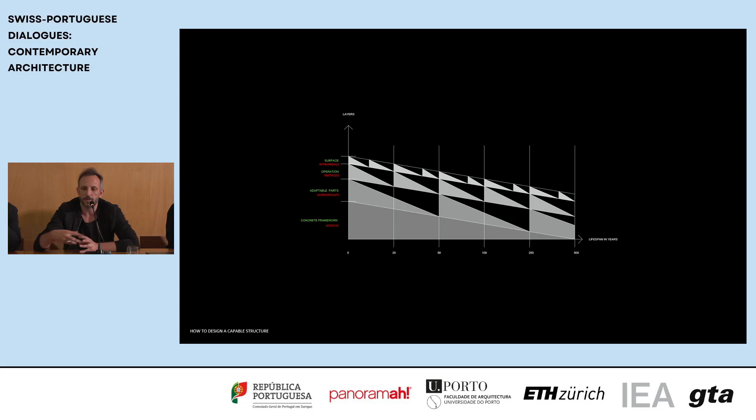So in order to design a kind of high-rise, we thought about, well, what can we bring to the table? It was about this single idea that can be read at all times and that can actually survive any change. And the most important part for us was actually to provide a basic, let's say, rigid tectonic that then can be adapted.

The way to build it is actually self-explanatory, but there's one way you understand it as a reality and another way you actually do it. The model you see here was only ever built to the part where the little drone is flying, and everything else was done inside our room at the time we were thinking about how to show this idea. On the other hand, you also see our entities - the very large, fluid, and flat, sort of spatial one in the institute.

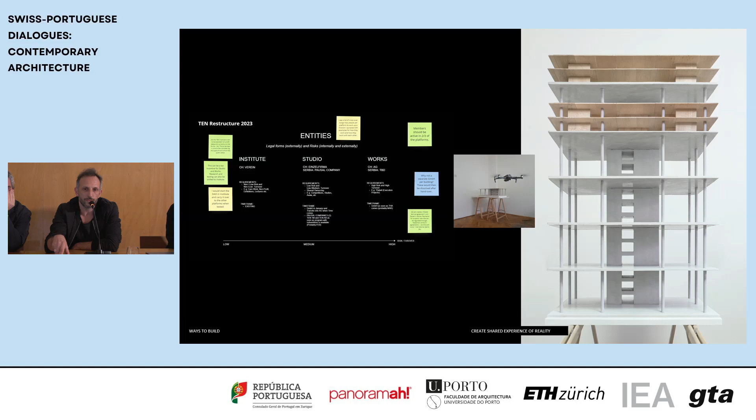That kind of structure, call it a capable structure, allows you to explore and determine other possibilities within it, which to us is an ongoing question, and something we're still designing in this building.

Even just understanding where you are from these rooms, you would know your place in the building. You would know your possibilities, and how to deal with the space - how to divide it, how to attach, whether it's a concrete ceiling, a wooden ceiling, or a wooden floor. It totally determines your everyday, from the acoustics to even the well-being. We think that's a kind of complexity and richness that could be rather beautiful in terms of how we design high-rises.

Of course, this plan was developed at the time so that any of these options, or all of them at the same time above each other, could work to provide a very long-term flexibility - the same way we think about how our organization works.

To continue with that quick chapter, I'll quickly show a project that is now ongoing. It's in the planning procedure, going towards a building permit. It's a competition we won a couple of years ago with a partner from Zurich, Zurich architects, also for a high-rise. We were lucky that the second attempt landed.

Here it was really about thinking again the question of why do we even want to do a high-rise. Is it actually an answer to the biggest question we have today in terms of architecture and production of space? And that is resource, and sustainability, and actually our planet around us.

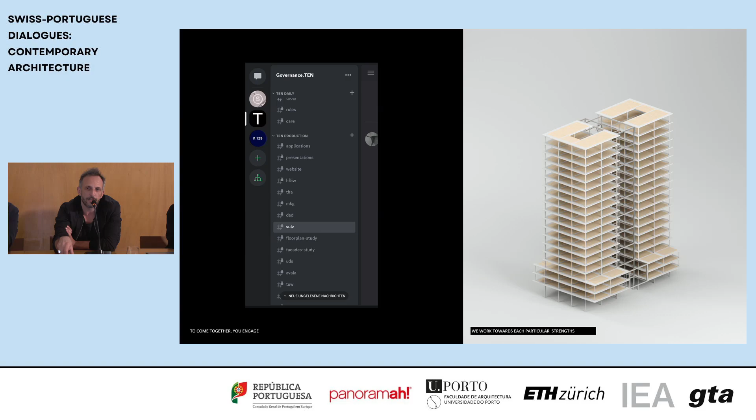So steel, basically going fast and going vertical, much like the American experience has taught us. Concrete, which can be prefabricated and be very repetitive on both sides, providing open long-term stability. And then wood, which would also give it its color, its smell - another kind of lightness to the whole ambition. Somehow pairing these strengths together was a mission for us.

And we wanted to make that readable. So at the moment you're seeing some preliminary design drawings and images that show this tower, which will be developed further - the plan of it, and thinking about it, what is there to show is still again the question of this meeting in the middle.

The meeting middle, which usually in such a building can be very dark, gloomy, can be dangerous, although maybe not in Switzerland, is a place where we wanted to actually have the neighborhood going up. All these apartments, north and south side, are double-side orientated, using the two-sidedness of east and west in the middle and the core for how you get home to meet your neighbor. Somehow a little bit how we operate in TEN as well, and the diagram on the left also shows that. You see this gravity field, this kind of entities, but also many other points of interest that can totally disrupt us. We think that's also a nice way to come home every day, not through the same corridor, and actually having a chance to meet someone.

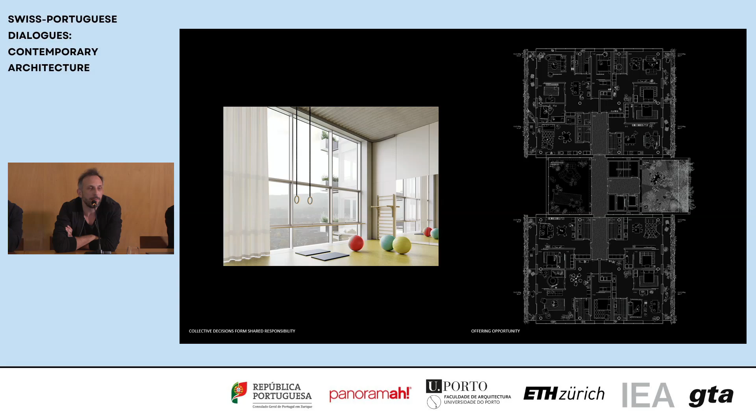These spaces offer left and right. On the right side there are gardens, and on the left side there are multifunctional spaces like aulas. We called them the winter gardens at the time, and today we were with the Panorama team and saw some beautiful examples of how something like this can be realized. Those are spaces that really belong to every resident in the house. So in a way we designed the tower so that these spaces were a gift in terms of economy of surface, in terms of engineering, acoustics, energy, etc. So they really have low demand but offer quite a lot.

In the sense that kind of collective decision—for some reason this isn't working—but that kind of collective decision making is a shared responsibility. The same way we work in TEN, the same way we accept or reject work, we come together, and it's never about a hardline vote. It's always about a mission and an understanding that we want to be in the same place and want to work together.

Sadly, the video on the right side for some reason is not working, but it shows you through these left and right alternating spaces and gardens going up, offering a very different sense of being, in terms of experience—wet landscaping going up—because one of the questions once you design a tower is: do you ever see a bird on your balcony? We wanted, working with Inside Outside, our partner in landscape, to develop an extension of the park that the tower stands on. So in a way, we're still facing this question of how to bring together an idea of residence and housing into something that is fundamentally one of our programs, such as capable structure.

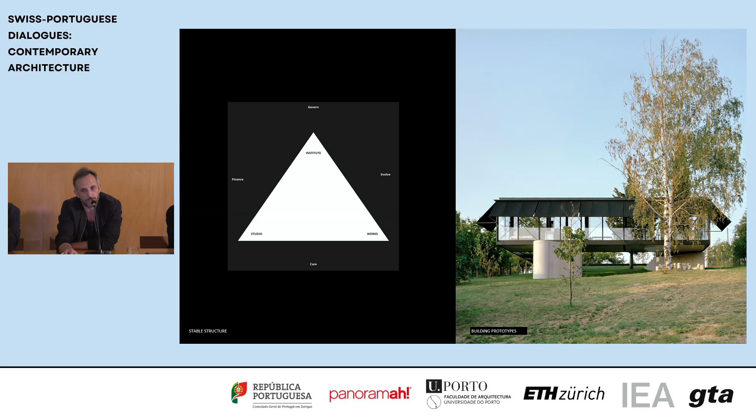This person specializes in interior wall finishing, basically plasterwork, and wanted to do a kind of model house. We immediately took the challenge to say, well, we will try to design with him and build with him a small prototype. This prototype was done with incredible sufficiency, and this sufficiency we needed to bring back every single time we talked about the project. But it was really about the ambitions first.

And the same way in TEN, it's a kind of initiative culture. So anyone can start up a project in TEN. Anyone can come with a project, or anyone can actually take over a project. All that it takes is a clear mission statement. So we do work a lot through these initiatives—you will see some maybe in the lecture. And they're very simple: as said, meeting digitally, physically, or through annotated notes, you take action.

And for architecture, we learned that actually the best way to take action is just to do something and make something. So we made this model at the start of the project, and it was the most stable factor throughout the process, even talking to every single participant and stakeholder through the construction mission. To make initiative is actually, I think, a nice finding from one of the cooperatives we were studying, Valve, that Lucas will talk about later—that you need a rule of 3, which we realized really works.

So you somehow need 3 people to initiate something, which in this particular case of a project is also the minimum load-bearing structure, because we thought about what holds a square and actually understood that it's 3 points: the 2 pillars we designed, and the third one being the soil.

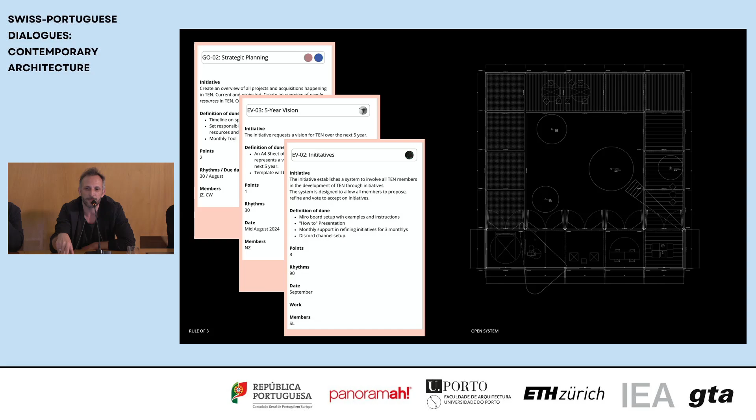So either you have a kitchen of 50 square meters, or a bedroom, or a toilet of 50 square meters, and you cannot have all at the same time. Makes it a bit difficult for guests.

I guess, so stepping into a TEN structure, you really have to get used to it. But it's about taking time, understanding the pieces in place, understanding how they join, understanding how to read it, and also how to change it, because that's really something we are working daily to achieve.

As said, I wouldn't even call Zoran the client. He is more of a collaborator of ours. So we work on the principle that there's a group of 15, 16 people at the moment, but by need we can expand, the work groups can expand. And here it was really the expansion through working very closely with him from the start.

So in a non-traditional way, never hide anything from the client. It was a proper experiment. Luckily that worked really well in this case, but it was also embracing his reality and his limits.

So he brought the third partner, and that was his friend who was 1 kilometer away, and he said, I have a very good friend, he knows how to work with steel, let's make a steel house, although he had no clue about it. So he likes to brag that his house was designed by Swiss architects, but actually that's really how the construction site looked like every day.

So sometimes you can really take that insufficiency or the lack of resource and turn it into something else by design, and add value through that.

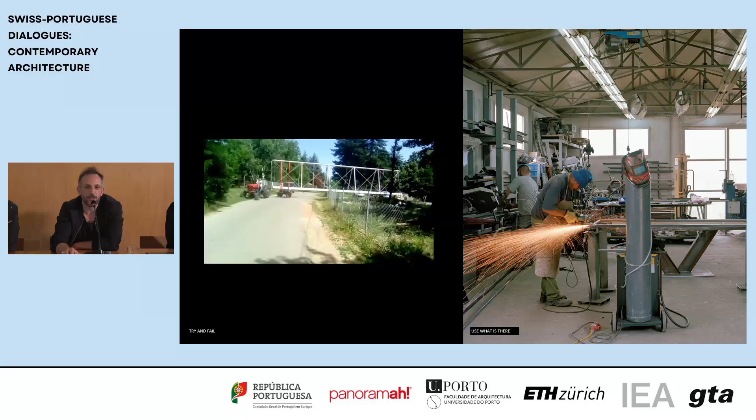This was really, in the words of Richard Wentworth, the British artist that Tom often talked about and introduced us to: making do and getting by.

This was a conversation, just an excerpt of a conversation that was published a couple of years ago in a magazine called Accattone. And unlike the internet, if you Google this house, you won't find much, but in this magazine - I recommend books still, before internet - the entire conversation is laid out with him, with the most important excerpts, on how decision-making was happening, and all the trial and error that seemed relevant at the time.

What happened after the finishing of the house is, I could say, not private, but he continued to play with it. He took it as an open resource. He said, I'm not going to just protect it now, I'm actually going to explore.

So he started adding these kinds of light builds to it, essentially extending his, in winter, his let's say in-between climate zones.

And we found it incredibly beautiful that he just somehow, without ever consulting with us—because these photos were actually, we found out only when it was done—he kind of just respected the project and continued to work with it, which for us was really a nice way to understand it as one of the capable structures.

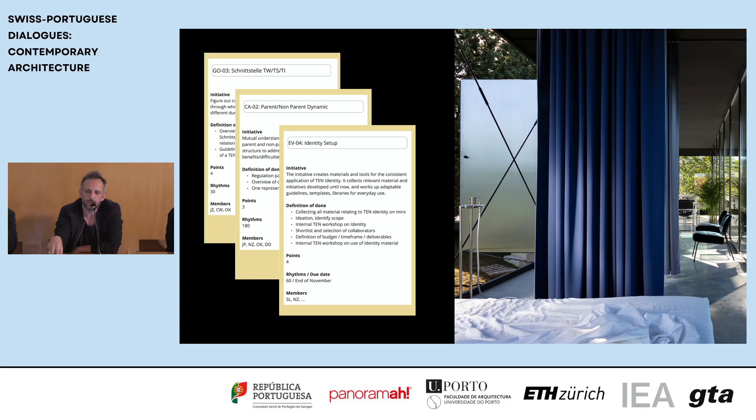So the care is something that we really brought to, I think, this project back in the day, and I think he also started to understand that and see our engagement as a young architectural practice, but he took it to a kind of whole other personal level by essentially using the house in any way possible for parties or actually quiet weekends for himself and family.

And our role in the project, and I think that was quite nice, was to really go until the very end, even constructing with him, cleaning and maintaining with him, and actually gardening with him, until we somehow achieved this kind of, you could say, an open prototype that is basically an open playground.

To jump to the next, I think this is a project we did many years ago, actually outside of Europe, in the Nepal Valley, called Thame, after the devastating earthquake that happened in, I think, 2015. We were invited to develop a residence for monks, 10 monks, on a very high remote point, and one of course the premises for that was this devastating earthquake.

And what we realized very quickly in collaboration with the locals was that essentially there were several, let's say, design and engineering failures that actually often are repeated with these structures. And this was really the first thing, and perhaps the only thing, we were able to tackle at the time. But I think in the long term, it was a good thing.

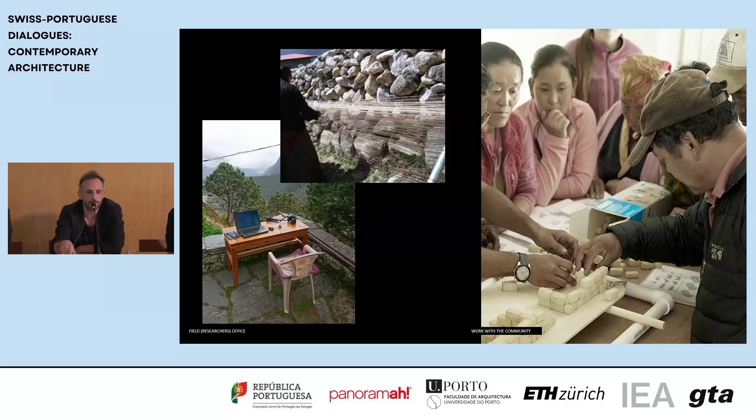What we learned very fast is there were these kind of ways that they built. One was really using gravity, and the other one was actually against gravity, but maybe Lucas can continue there. Okay, I hope I can keep up with your nice flow.

So, as you can see, one of the main challenges was the remoteness of the place. It took a 2 days hike to the next bigger town, so no road for vehicles, only helicopter or footpaths. Which meant there was an absolute demand to build with minimum means and also light materials, in order to also protect the people that would be working on it.

But also in a way it was something that they actually had experience with. And as you could see with gravity, stone is one of the main sources there. The forest is protected—it's a UNESCO heritage site—so wood actually had to be imported; they were not allowed to cut trees. So the main building material was stone and sand.

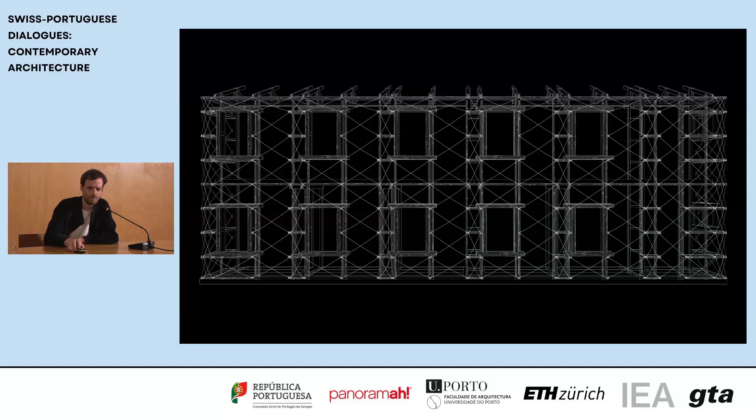Maybe to switch back again quickly to TEN. One of the things that holds us together, maybe the most long-living ones, is the mission or the values. We started with some values that are very simple, and I think it's not the single one that matters but the whole as an idea, why we wanted to work together. Of course they get edited and adapted as time grows.

What was interesting is how much a little change in something can change the whole. Here we developed a plaster system with the help of 10% lime, which made it much more resistant to weather. It's actually river mud that is slightly stabilized. There was probably no cement or almost no cement involved in building. It's by far the most sustainable building we have ever done, but out of outer means. This is the finished plaster, and in the sense of emergency, it's also something.

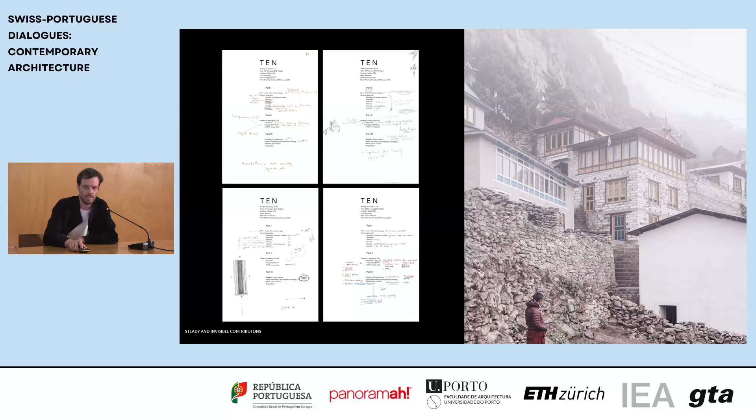But what was very special and unique in this space was the green space. It's still at the moment this long connected space, and one of the main limitations of the competition was the master plan, which had L-shaped building volumes—something we were quite skeptical about. We almost didn't apply for the competition because we were unsure if this was a good solution. But then we tried to work with it and preserve the space while doubling, or even almost tripling, the amount of flats it would offer in the future.

Something very relevant we tried to do, even before drawing the first line, was to think about what would be a strategy for sustainability. In design phases, you always have the biggest leverage in the beginning, and the later you go in the project, the harder it is to make a difference. So we looked at each element and tried to figure out how to build this thing, how the different entities or elements would meet. By looking at the weight, we figured out that already by making a lightweight building, you could reduce 21% of emissions.

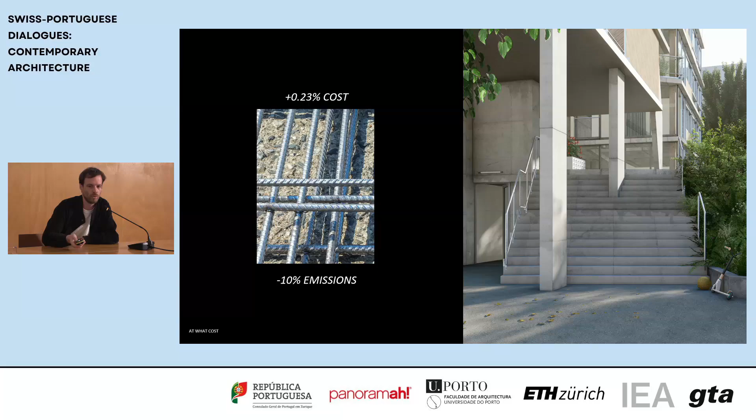And also with wood, we learned it's only certain specific types that are more sustainable. As soon as glue is involved, you're sort of in a minus.

So to talk a bit about the project, it combines three different typologies. One of them is actually almost like a little row house that goes over three floors. So you have an almost private entrance that you share with your neighbor, which is just the entrance space, and you go up. There's also a little basement behind, and you go up to the garden level where you have the kitchen. This flat contains four identical rooms, each around 14 square meters.

We developed this typology for maximum flexibility. So it can be for a family, it can be for student housing where you share apartments. In a way we looked for a very big amount of use cases.

We also took up this kind of strategy on the access balcony type. Again almost identical room sizes. What you also see that goes through is the structural cross that we need for earthquake resistance. Here, as it's another type, you can kind of decide between the public side and the private side - one is the south, and the other one is the lake. The cross is sort of creating a border between them, and we had the idea that you can choose where you live - do you want to live on the public side, or towards the lake and sleep, vice versa?

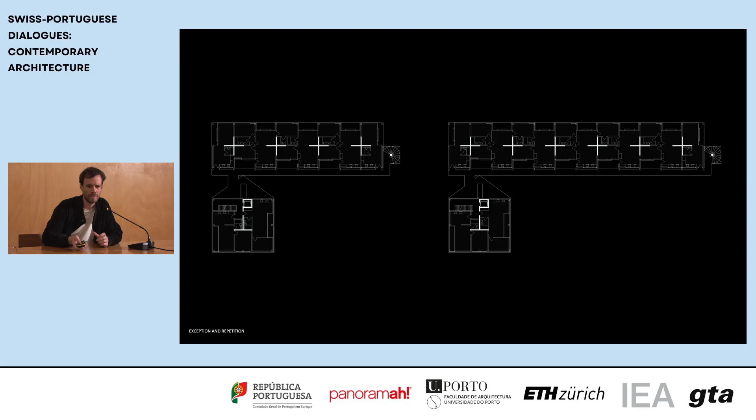Yes, and the third one you see here is social housing. We also had the goal to minimize access and lifts, so that all the access is almost cold. The lowest one is also optimized for elderly people, so they have direct access through the building. And that's the three typologies coming together.

So, geometries of work, we call this. How we come together is obviously also a question in the everyday, and we try to find the right balance between individual work, group work, but also using the power of the bigger group. One format we developed that we're still refining is the design sprint.

It's also something we learned from Tom, as many things. It's a clear task, and you have different teams working on something, and you meet after 24 hours again. It's not a night shift involved, but it's also just a time to reflect a little bit. And it helped us actually for certain questions quite a lot, where we were in doubt. We kept repeating this, and we always made progress.

One thing we're doing also is research about how collectives meet, how they work. At ETH, at the moment, next to the design project, there's a collective research done by the students. It's a group work based on interviews, and they drew the function of a record label, of a decentralized autonomous organization for circus artists in Berlin.

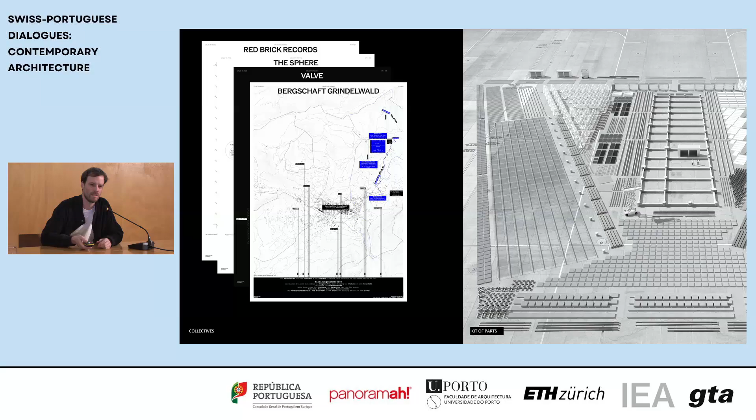Valve, a game company of 500 people with a completely flat hierarchy - it's sort of a techno-anarchy ideology behind it. A 400 year old cooperative in the Swiss mountains, which is based on a treaty that is only in its 4th edition. So collectives can also be something very resilient and stable.

Republik, a news outlet that was founded more or less the same time as us, and it has been fascinating to talk to them. They also started with an association, and they have quite a sophisticated legal construct. And also an architectural collective, Assemble, who was founded in 2010 from London.

So to end up with a project that is an emotional project for us, it holds a special place in our hearts, the House for 5 Women. It's also the one that has occupied us for the longest time—7 years it took until construction, and it's still ongoing, there's still things to do. It's based in Gradacac, a town in Bosnia, close to Tuzla, 3 hours from Sarajevo.

It all started with a plot and a woman, Hazima. Hazima fled during or just right after the war to Basel, and she contacted us through Engineers Without Borders of Switzerland, who also were our main project partners. They did very difficult work, not actually the engineering, but all the funding and the legal framework, which is complicated in a country that runs on a peace treaty without actually unified governance. In general, I think it's really the people we work with that make the difference.

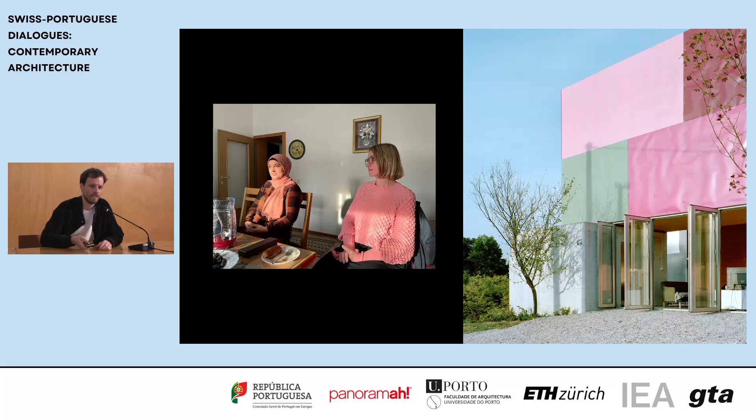So also from the constructor, that's Hazima's brother, Mustafa, who takes care of the land around. From him we actually learned where to plant the trees or where to take the right soil. And Subia, who is a care worker still engaged with the women, and also local craftswomen that were very inspiring to visit and work with.

Bosnia is a rural country, and to get to know it and its culture, at least for the people from Zurich, it was very important to visit it also throughout its territory.

One thing that was also striking was the way of self-help or adaptation. These roofs were usually done by shingles, but they started to replace the shingles with flattened oil drums or other metal sheets. This was sort of the main inspiration for the facade, to take this technique with very thin sheets that we painted in a car paint factory or a garage. This was a collaboration also with the artist Shirana Shahbazi.

On the right side, you see Daniel Ganz, also a close friend and collaborator of ours, who was helping us select trees and plant them. Also to mention Adam Jasper, who is always working with us on different things. For us it really means a lot to extend the network and get people in and collaborate.

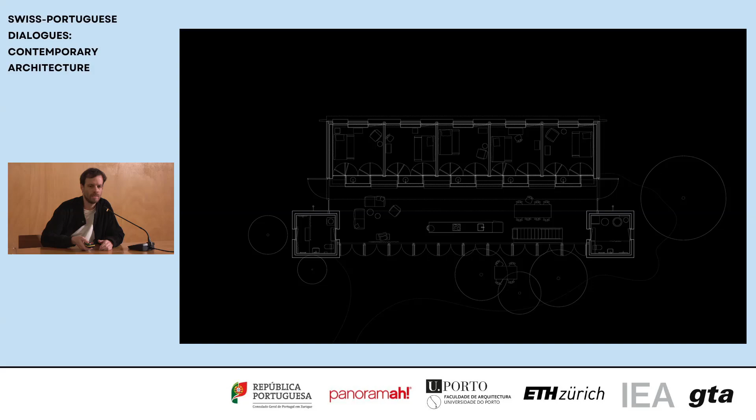Also, as you see this floor plan, it's very simple. It has a central space that can be either living or production, oriented towards the landscape, which is also sustaining the house. A lot of what they eat is grown on site, and through clearly defined thresholds you get to the private quarters, which are 5 spaces. We didn't really know in the beginning how the house would be used.

One space to mention is also the storage on top. It's a multifunctional space, also there to use as a mass sleeping space if there are workshops or gatherings. But one thing we realized is that how the house would be inhabited was hard to foresee.

In the end we thought actually all 5 rooms would be constantly occupied, but they figured out it would be best if one would always be empty to serve as a place for an emergency or a refugee. There were families living there—way more than 10 different women, sometimes with children, have already lived there, and some are constantly giving more stability and doing a lot of very important work.

So it was very important for us to make this house also a place that they would be happy to make their own. That was also one of the main ideas with Shirana. In a way, we had the raw structure, and we said, actually, hey, you decide on the surfaces—maybe not all of them, but it's a start—and we let them do the rest.

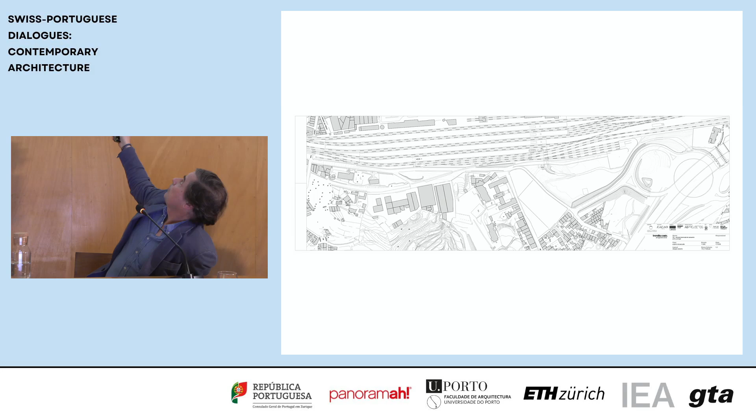So you see the place was a kind of a mess. When you came out from the highway, there was this lost place, nowhere place with no roads, very difficult to walk and to drive in. But there were three main structures that I somehow identified: this old, beautiful industrial equipment, this 19th century college, which strangely looks to the north with this patio, and then there was this old farm, this old building that, in the briefing of the competition, they said we could even throw out because it was in very bad condition physically, and also in very bad condition in terms of urbanism because of this stressed distance to the highway and to the railway rails.

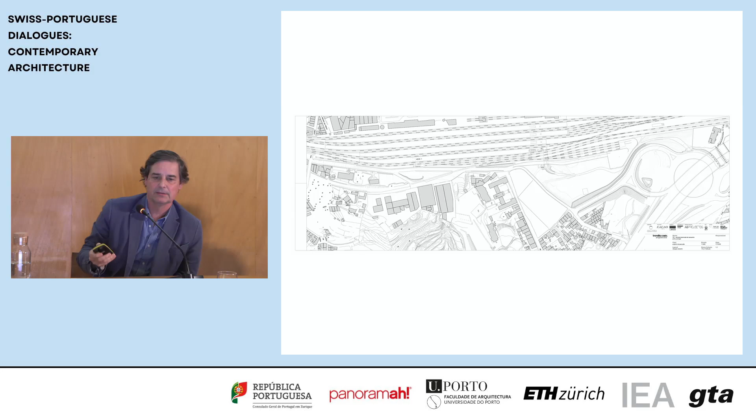So in a way, I identified these three morphological elements, plus the highway, plus the railway lines, and this fragment of the old city that was somehow lost on the east part of the city. But this is an old story, because the railway in the 19th century cut the city in two, and the east part of the city, below, started a process of being forgotten, socially and physically. Nobody would go here, nobody would cross the railway.

And then in the 90s, they made this highway, and this became even more like a lost island, this piece of land.

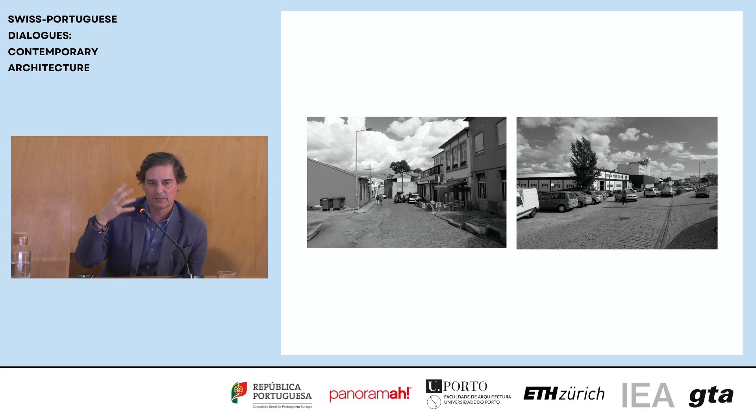So these are some pictures of before my intervention. As you could see, it was this urbanistic mess where you couldn't walk properly, a very rough place, no trees, no parks, no gardens, a lot of cars. And even to go through the places, there were all these kinds of anthropic situations.

So, as Philip said, in the 90s I lived - I was very young, almost still a teenager, I was 20, 22 or something. And I lived in Switzerland, where I was working with Herzog and de Meuron. And I got to know, one weekend, this incredible building by Aurelio Galfetti, which is the swimming pool of Bellinzona. And I was always very impressed by this building.

Then later, some years later, a beautiful coincidence happened: I taught in a school in Spain with Galfetti. And in a conference, he showed this building and detailed the explanation of it, which I already knew. But what is really incredible is that Galfetti, with a very simple line, on the argument of doing a public swimming pool - which in the end is just a tank with water - with this simple line, he somehow solves a lot of questions in the city, a lot of articulations, and especially introduces a new atmosphere in a place with this very simple gesture.

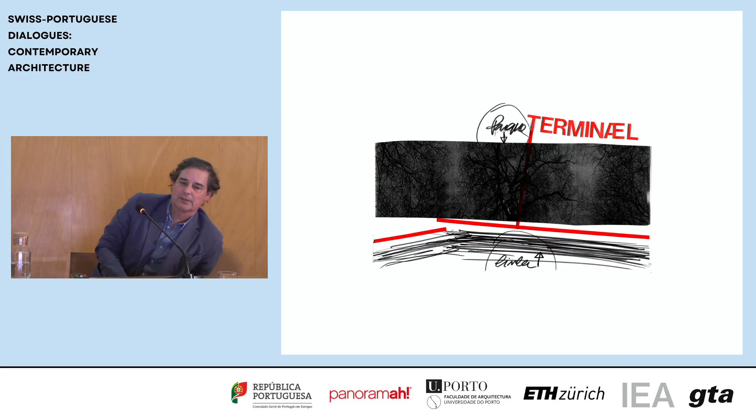So this was, in a very early state of the project, a very strong reference. It was my reality in a way, and I had to compose this reality with the real state of the place. So I thought about stressing, as far as I could, this big program into a limit very near to the railway station, to liberate ground in the east to somehow plant a big park, because this area of the city was, as I said, very rough, not very pleasant.

So in a very early stage, the idea of the terminal started to be an infrastructural building with a very simple geometry, stressed into the railway line, to liberate the place for a big natural park. So this is an early sketch I made on the table.

And as you see, I drew this alignment, south-north, which somehow corrects the city elements, introduces a kind of rule. And then I made another line, another alignment, parallel to the railway lines. And in between these two alignments, there is this triangular space that would be enough in surface for the terminal.

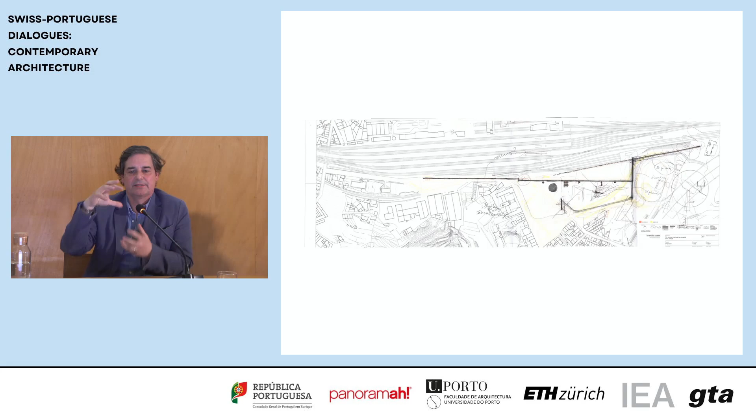So there is this kind of dialogue, or dialectic, between this artificial gesture of the architect - which is to draw an alignment, a mental process - and the nature with the topography, which in the end is not totally natural, to make this relation between this new building and the existing urban elements.

So, some pictures. As you see, there is this very strong alignment coming from the south, from the light of the river to the north, and then there is the other alignment that is parallel to the trains. In between there is this triangular huge pavilion which produces the space for the buses. As you see here, it's very clear that suddenly this building, and of course this one, turned out to be the pre-existing key of this strategy.

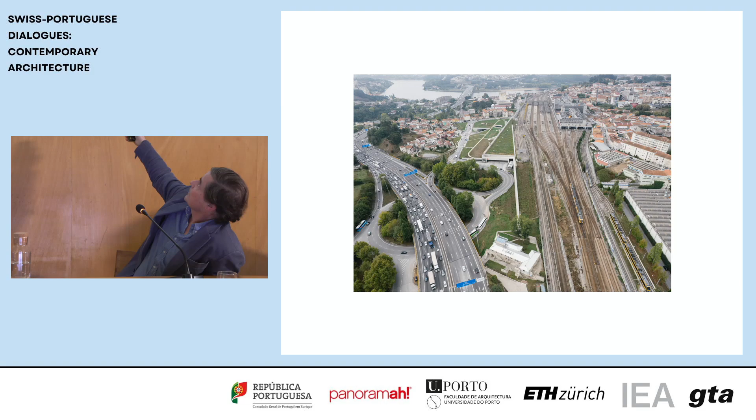And then this once-lost fragment of the city, this being the gymnasium, somehow is connected to all these structures. And then in between there is this big park, which extends the existing natural elements.

So, the building is also a typological exercise, a very old known typological space, which is the gallery. So the building is a big gallery, divided in two levels. Here in this model you can see the high level, which is the level of the pedestrian.

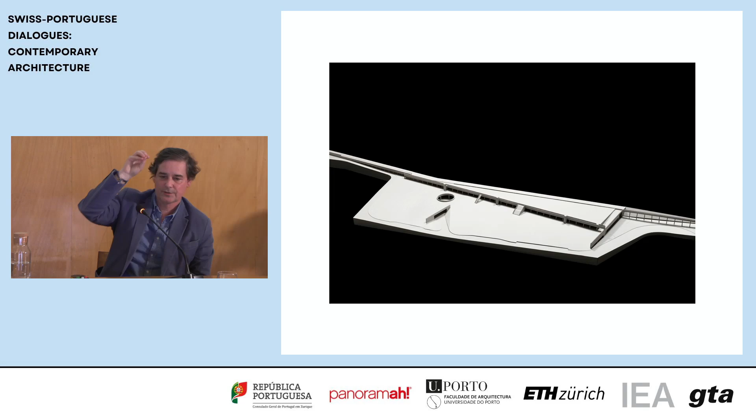When people are walking on this south-north gallery, which links all these urban elements and makes the vertical points to go down to the terminal. And on the lower level, it is the level of the mechanical circulation: cars, buses, bicycles, etc. So there is this horizontal kind of urban morphology, and then there is this vertical separation of functions.

There was also another issue which was very important, an economical issue. I had an intervention of 50,000 square meters, 13 million euros, which is like nothing. So we had to do something with very few means, very economic, structural and constructive process.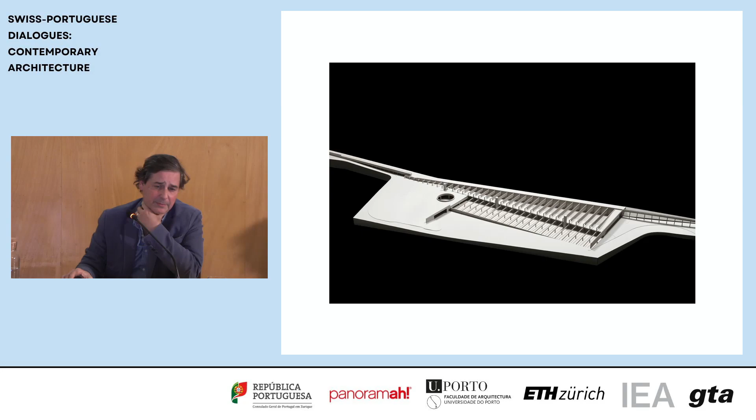So we defined this modulation, the modulation of 3 cars parked, 7.5 meters, to make this portico that repeats all over the structure and somehow organizes all the program, all the projects, and all the spaces. Also very important, you could imagine the cost of treating all this, very big spaces of this amazing dimension, with mechanical air.

That would be unsustainable. So we had to make this building as a breathing organism where we define these big holes, so the air circulates in a natural way and there is not mechanical treatment of the air. That was also very important.

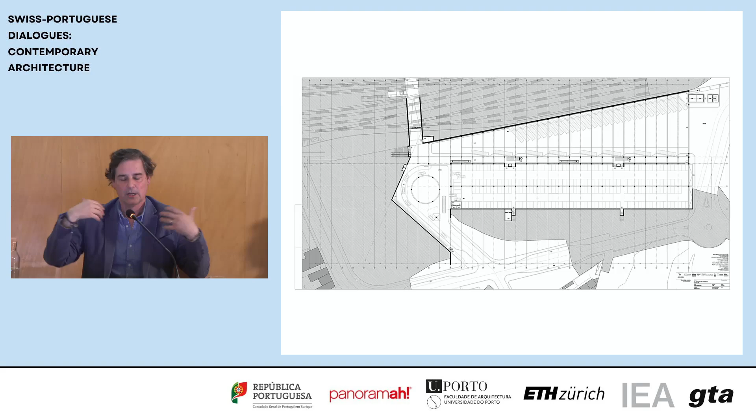So in a way, the building is designed with these economical and functional preoccupations, and it's also a result of the input of the mobility engineering with the cars and buses, the dimensions they need to park and to drive, the calculation of the surface of air that has to go inside the building and go outside, and the fluidity of this air. And then the geometry of the place, or let's say the geometry that the place gives us, to define the space and the urban strategy.

So this is the ground floor. It's a one-way building, so the cars enter in this part and they go out through north. And there is this big roundabout, a 20 meters diameter hole that brings air into this building, also here and here.

Here, in between the beams of the big hall of the buses, we put all the administration, equipment and services of the building. These are little cameras made out of glass that look to the terminal as a mezzanine and to the park at the east, and somehow they live with this gallery where people are walking around to get their buses and their cars.

This section is very important. You also see here that we had 20 meters from the lowest part of the plot to the highest part, which is the level of the railway. We had 12 meters that gave us the opportunity to include here the terminal, which needs a big ceiling.

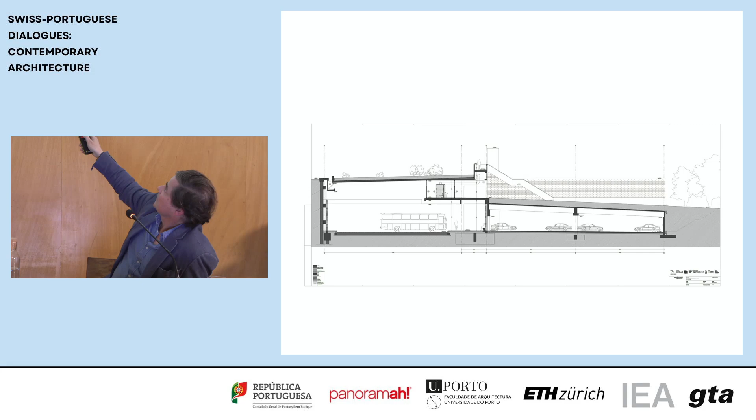And on the lowest part, we put the car park, and then this big natural park that follows the topography, and here the services and all this air circulation. And then there is here a technical gallery, but this is the walking gallery looking to the park and looking to the terminal.

And then the plan of landscape design, which was in the end the most important plan, expresses the idea that the building is like a surface that is on the back, and what is really important is the presence of this big park in the city.

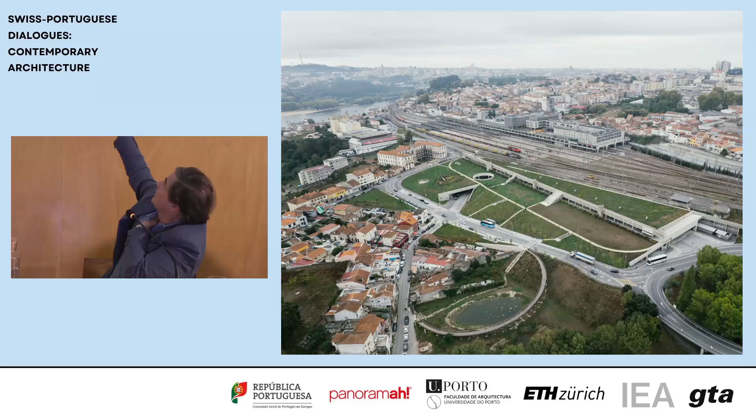Okay, so I show you some pictures. You see here the entrance, the big hall, the gallery, the triangular space, and these buildings. And here this water pond that catches all the water that is coming with the topography, and there is this kind of wood bridge that puts people on the lowest level of the ground.

Well, I show you some pictures, first as far as the building was finished. It was with the park still not very grown, but you understand this portico that somehow defines this architectonic structure that at the same time has this industrial atmosphere, but in another way it's also a very anonymous thing.

And then these more recent images, already with the building with some life and the park growing. But you see in this picture very clearly, with the topography and the presence of the trees, that the building is like a scenario which is in a second plan, just passing. The entrance of the cars, the park, people, and here the old city.

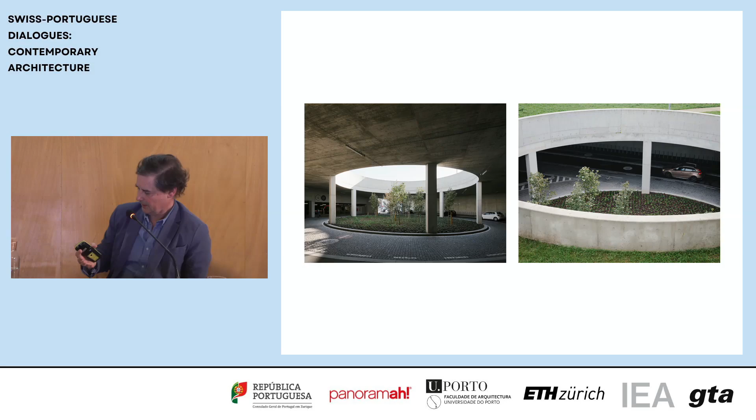And in this view, you understand also this kind of topographic element, which is the terminal, establishing this rule of the surfaces of the city. And it's also very clear here the new relation that this fragment can be made through this big infrastructure.

Well, and then inside you see this is the pavilion, the big triangular pavilion for the buses, and the mezzanine for the services in between the beams.

The big mouth of the north, where the buses go out, and also where we ventilate because this last door has like 40 meters span. It's a lot of air that you can put inside the building, and in the end, it's like a covered plaza, a covered street, let's say.

But it also looks like a garage in a way, because it is a garage. But it has the idea of being, in the end, a big public space.

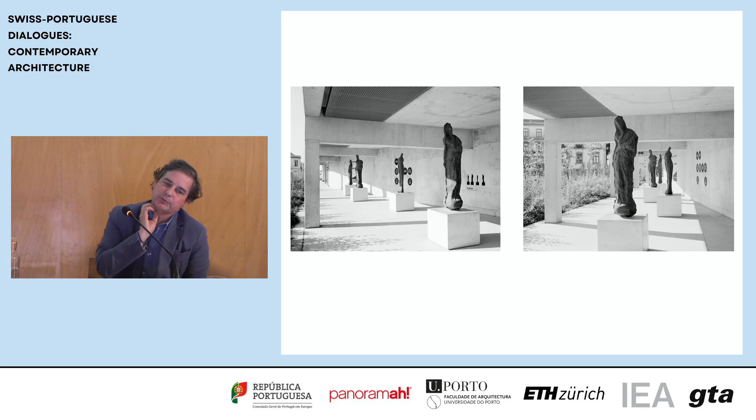And then I asked a friend of mine, who is a great artist, Francisco Tropa, to make an intervention. And he decided to put these statues, which are also a classical figure, Penelope, the wife of Ulysses, and he put them in this path where people cross every day, and they somehow mix with the people passing, and with the structure of the building and with the nature.

And on the garden he put these two fountains, which are also of the classical myth Danae. And they introduce the idea of water and the sound of water, which is very nice in this atmosphere.

And then the highest gallery, which is nice because it gives you another level of understanding of the city.

You see, the building is very poor. It's just on its bone because there was no means for more. It's just the structure and the infrastructure, the electrics and the water.

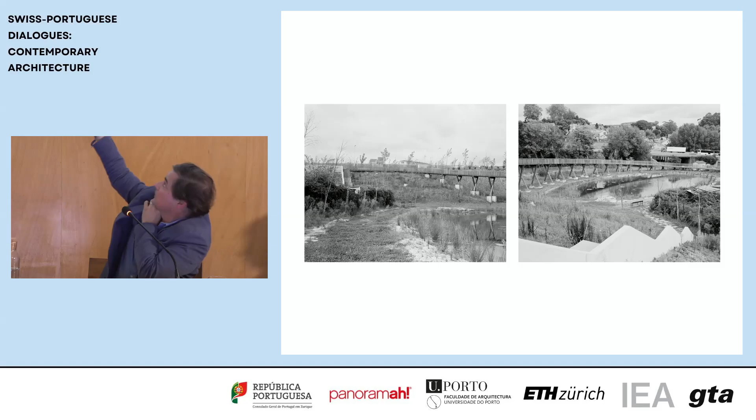Yeah, and then there is this north bridge that goes to the little palace that I decided to rebuild. And this is the lake of the water, where the water is drained, with this wood bridge structure.

Yeah, and in the end, you just see this - the building is much bigger, but in the end, you just see this kind of skeleton that organizes the urban space.

And to finish, I will show you what I propose for this little palace that I could even throw down, but I decided to keep the building. It was extremely destroyed, inside it was totally destroyed.

There was no memory of its history. It was only the morphology of its main structure, which are the stones.

So this is about a new function on the building, a modern function. I proposed that it would be an office building for the administration of this big equipment, and they are moving there now. So it was an idea that the municipality accepted.

This is the state of the building, which was very bad, very transformed. It was no longer this 19th century romantic palace, it was just a ruin, and inside it was totally destroyed. It was very changed, and worst of all, it had this very dramatic context situation where it was so close to all these infrastructures that it lost totally its sense, its historical sense.

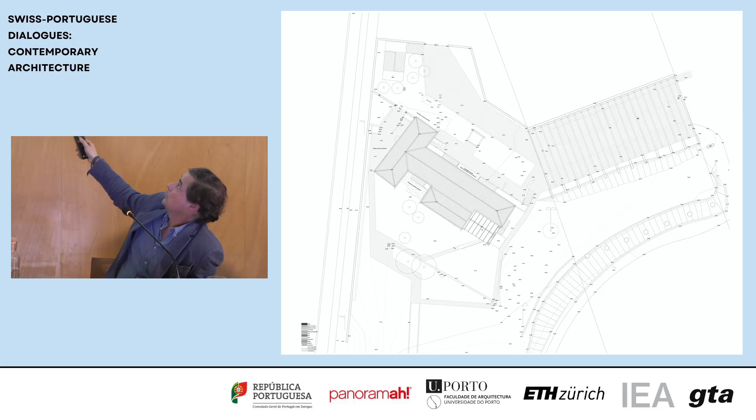So I proposed that this building could be this extension of the park where you come out from this bridge, and I threw down all these walls that were around the building, but this I couldn't change - the highway, the railway, this ugly staircase. So I just tried to clean up somehow this landscape, make it as an extension of the new park, and give a new utilitarian and functional sense to the building.

So I kept here this photo, you see this dramatic distance to this infrastructure. How could someone do this to this old farm, but it was done.

So our strategy was to keep what was really powerful in the building, which was the stone walls. We kept them all, we didn't touch them at all. And we put in an inside structure, very light, made out of masonry, which would sustain a horizontal structure of wood to make the ceilings and the floor plans and turn it into a utilitarian building.

These buildings from the 19th century, as you know, were only used on the first floor, which was the piano nobile, let's say, and this ground floor was always used for storage and animals and all that. So they didn't have a staircase inside or bathrooms. So we had to make this new staircase, the bathrooms, and an elevator for handicaps, because this was the entrance to the house for the second floor, for the first floor, because the ground floor was only used as storage places.

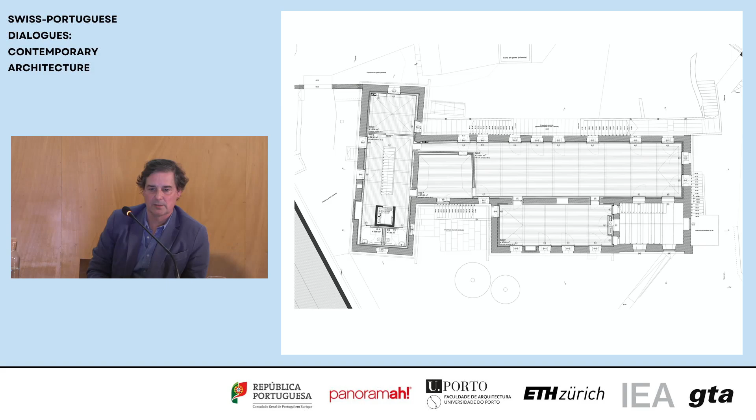Then there was the church, the little chapel, which of course was no longer used for worship, so we decided to turn it into a little auditorium for meetings for these people, which is working here.

So as you see in these drawings, what we kept as essential was the stone elements of the morphology of the building, and all the rest, in a way, is like a new building, a new utilitarian building, meeting the new regulations - thermal, everything - for an office building.

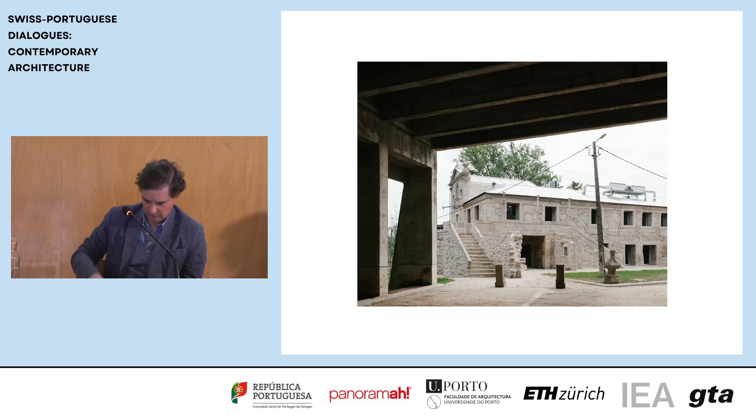So it has this very dramatic situation with the highway, which is somehow kind of surrealistic, if you imagine that this was one of these English old farms from Porto.

So the dialogue between this infrastructure and these elements, and the old building - we rebuilt this fountain here, and we tore down the walls so we had some space to breathe.

And we didn't touch the outside walls at all. So here you see in this section this very light structure made out of wood, and these masonry walls with thermal isolation, that sustain this new wood structure. So it's like a light box structure inside this old stone structure.

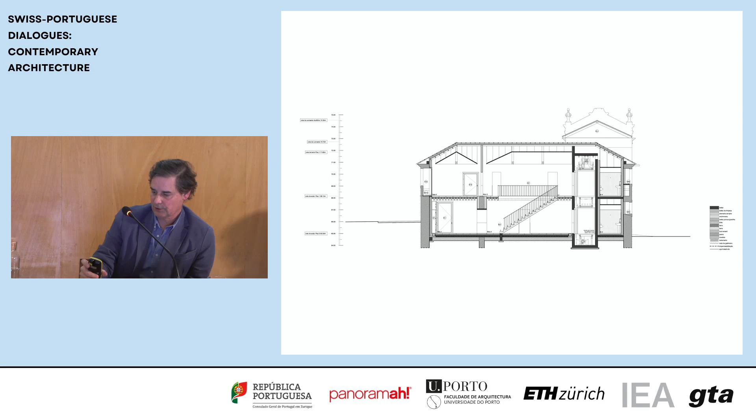You see the wood beams, the new wall with plaster, the new staircase, and these are the rooms, which are just an open space with the wood structure and the old windows as they were.

But in a way, in some details, it still has this memory of this old English farm that it once was.

You see this structure of wood? This is all made out of wood, very light. This is the top floor with the new roof, also made out of wood. It's all new because there was nothing inside.

And here you see the old room that we kept, the elements that we could keep, which is this, beautiful. And this big room in open space, which is made out of the geometry of the space between the old stone walls.

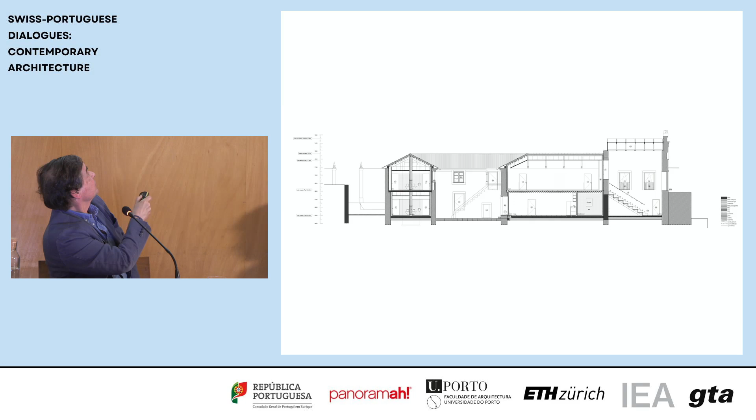And here you see the chapel was here on this level, but when we arrived this floor was destroyed, so we realized that this space had some potential. It had some monumentality, and we decided to make this auditorium with a glass roof. And it's no longer a chapel, but it has the atmosphere of a chapel, which is this space.

You can also walk directly to the auditorium coming from the terminal, from the garden. And also very light structure, this is made with aluminium and wood, and the stones have been kept as they were, as found.

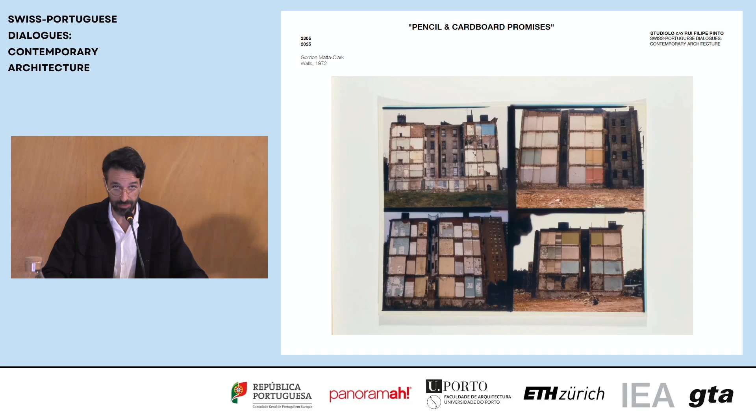While the images exhibit a set of scars from occupation, traces made of debris and wallpaper that aesthetically opposed the then-dominant abstract expressionism, thought to directly evoke an associative image with which each observer could relate. We are somehow interested in creating these associations, a kind of architectural density created with and through these traces.

In the Tukuk project, the transformation of a house into a restaurant, the first floor of the house is converted into the main dining room. The small divisions disappear to give way to a spacious and generous area. The memory of the domestic scale takes shape in the floor, which, through the reuse of the old hydraulic cement tiles, draws a kind of rug that highlights the former typological organization.

In addition to the relation with the site and the histories it contains, there is also an interest in the history of architecture and art. The goal is to produce architecture of its time, but as T.S. Eliot defined in Tradition and the Individual Talent from 1919, placing importance on cultural continuity, referring to previous examples that, as references, assist, like a cane, in the slow and winding paths the project process often takes. Like any tool, this reference serves to facilitate, improve, and expedite the process, but is never the result in itself.

The work of Jeff Wall can, in many dimensions, exemplify what we have been explaining so far. Picture for Women from 1979 is one of the artist's first and most iconic photographs. The piece consists of a large photograph printed on a cibachrome transparency inside a fluorescent light box.

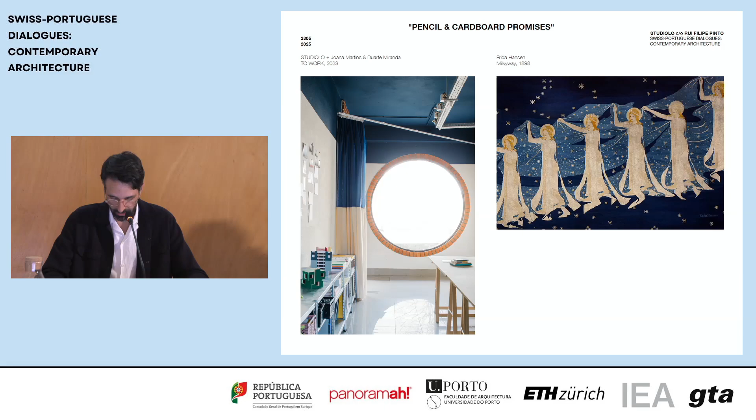We could therefore say that construction nostalgia is of little interest to us. Again, there is no architecture without ideas, so not every construction is architecture, and not all architecture is already built. The work does find a possible path between what is on site, what is on us, what we discover through the project process. The projects are the result of these constellations.

Okay, sorry, now it will be a bit more fun. Okay, so to start, I will try to be not too long. I will show 3 projects.

The first one is called To Dwell 2. It's a competition, and it was a competition in Portugal. It's actually the only competition we ever did in Portugal. If there are students here present, I don't advise you to take too many notes. We were last, so it's probably not a good project. And it's in Lisbon. It was for a... yes, let's say it like that.

It's in Lisbon, for a cooperative housing project close to the pavilion of Sporting Club Portugal in Alvalade. Lisbon, like most European cities, is affected by the climate crisis and the heat island effect. We started with the observation that most of the issues surrounding the site—today it serves as a parking lot, and most of the area around, except for some trees, is quite sealed, even underground. So this was a big issue, and we decided our proposal would right away unseal as much as we could, to create a different type of environment.

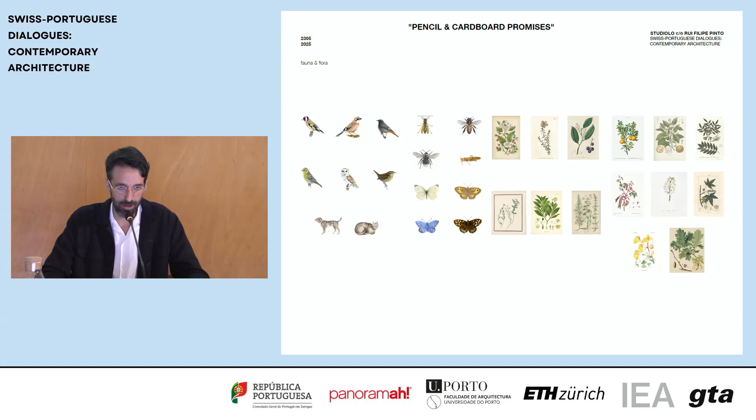We decided to return to a project dear to everyone—Unité d'Habitation in Marseille, still a quite sustainable project. It's a bar set between two strong gardens, with cross ventilation, views on both sides, and light coming from both sides. So it was clear to us, because of the plot situation, that we wanted to create two gardens so that no matter which part of the apartment you were in, you'd always have a green background.

So this is what we proposed. On the outside we proposed a garden, and on the interior courtyard, because of parking demands, we couldn't have big trees, but we proposed a kind of recreation garden where smaller trees could grow. We recovered rainwater from this point that we could later reintroduce into a more complex system I won't explain in detail, but we could reuse the water inside the house.

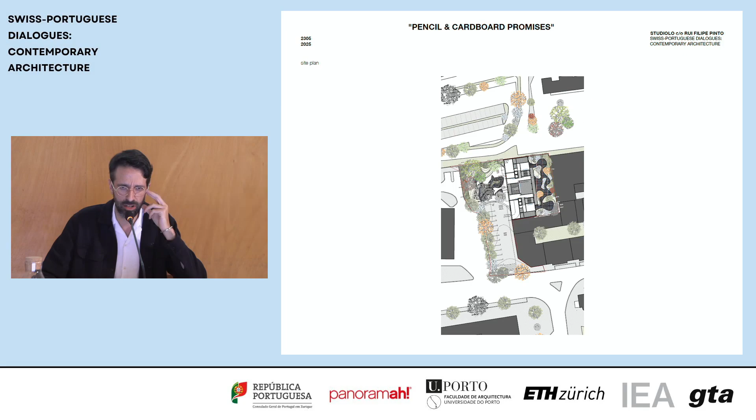Our main decision was to push the parking lot entrance below the building, also creating parking spots for the city in the lower area. This let us occupy the northern part of the plot with a garden that's still public, for the community, in relation to the public program we proposed—a cafe—and inside, people could have their own garden for recreation, with water gardens also proposed, and fruit trees.

Here you can see the implementation. The site was quite particular—we were ending the block, so this courtyard would stay open. We weren't allowed to open any windows on the northern part, so it became an east-west building. But at the same time, sometimes law is a bit unfair in this sense—we couldn't open windows on the northern facade, yet it's actually the facade that's more perceived, because it's the one you always have more distance to look at.

This was a strong theme for us, because it seemed like a lost opportunity, and also negligence not to draw it properly. We're always aiming to make something that has a certain freshness, but also relates to the site and the culture.

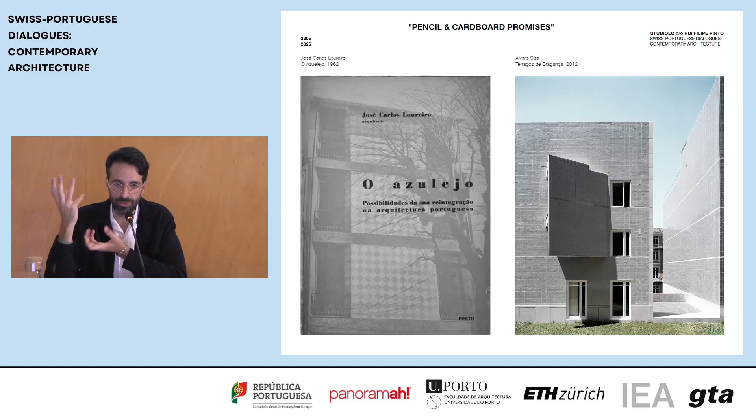So we looked a lot at the culture of tiles—a strong tradition of production in Portugal, and there's this beautiful book from José Carlos Loureiro about the tile. Not far away, still in Lisbon, there's this project Terraços de Bragança that we always liked a lot, not necessarily for its form, but because Lisbon has this beautiful light, and tiles have the capacity to reflect light differently depending on whether the light is higher or lower, so the facade would also change. Also, the way the stone absorbs more light could mark certain elements on the facade.

So that's what we propose. The building shown in red was an existing building with projected bay windows—we took this as an element and continued it. It's quite a simple structure. To maximize the floor height and building height, we made a super compact building with slabs of 20 centimeters, so we could add a final attic floor.

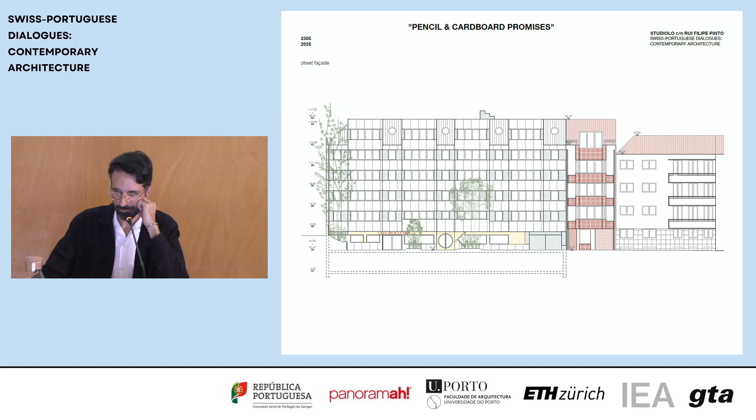But nevertheless, we thought that we took the theme of the bay window, but the small building was not strong enough to conditionate the organization of our floors. So it's a bit like a painting, you know, you have stripes, and sometimes the stripes are matching and sometimes are not matching. On the ground floor, the tiles were not blue, were yellow in order to mark the idea of the entrance in the Café Bicicleta. That was our proposition, a cafe where you could repair your bike, also somehow trying to awaken the idea of soft mobility in cities.

Returning to the facade that we were speaking of, when you have to make a facade, Siza has so many lectures and so many texts about how to open a window, and he used to explain how fascinated he was by looking at Adolf Loos' plans and the way he thought the window could be opened.

It's also more hard, or at least is a theme: how can you make a facade when you have no windows, when no one really cares about it because it's somehow a blank facade? And how could you still transmit something?

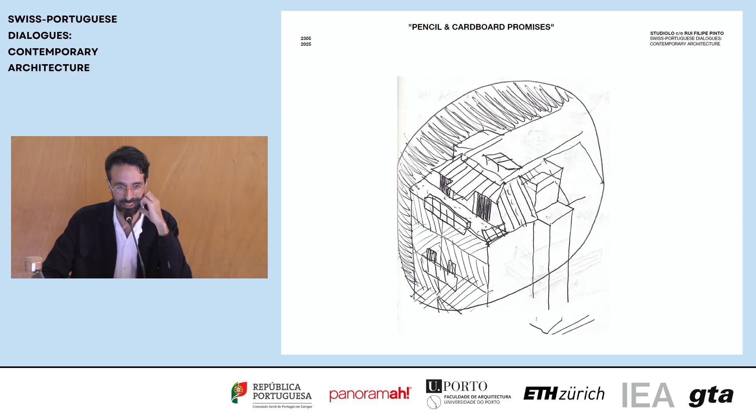We could have windows on the attic by making a step back of the facade, but on the lower part it was purely composition, because for us it's like a stage. It's like we try to make a painting, that's actually what we're trying to do. Not that we consider ourselves artists, but we are just trying.

And this is the facade we proposed. So there are like fake windows, it's just with the tiles. And also, if we imagine that with the difference of the day, the light will have a different orientation on the facade. Sometimes you would see quite well the yellow squares, and sometimes you would see much more like an absence of it.

In the end, we made a model for the competition, and later our good friends from FAUP said that it was totally wrong to make models in competitions in Portugal, so we were not aware. Maybe now we will do it differently next time.

But we made a model that would try to demonstrate, I think we can understand the idea that the bay window would then continue with these other bay windows, the stripes of the lioz stone that would somehow weave with the context, and then this strong face.

And to the back, we proposed a kind of a balcony facade where every tenant could be in relation with the garden. So even if you are not in the garden, you can always watch your kids playing with your neighbors. And so there's a kind of a more private world.

Then we also know that this is something that's maybe probably common in Portugal, in Switzerland. You don't win competitions with facades, you win competitions with floor plans. And there was a lot of pressure to make good housing, so the surfaces, the square meters, were really low.

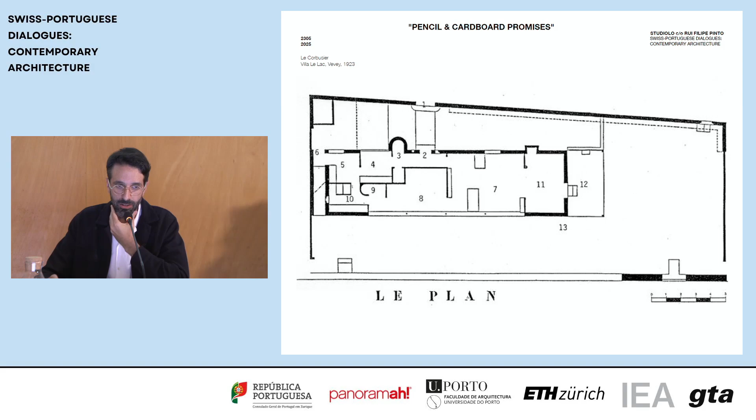When you enter, you can always circulate here where the bed was—even the bathroom relates to the fenêtre en longueur—and then we can always walk around this core, also from the outside, to get to his office. By doing this, Corbusier makes it so you never really experience it as a small house, although it's super tiny, through the perception constructed with a long window and this way of walking through the house.

So we tried to do something like this. It's a flat, totally different of course, but we proposed two facades that are super open, with walls, and between these walls you could always walk around.

It was also important to guarantee that if it's Sunday roast and it smells a lot, the kitchen could be closed. And the bathroom too—you could close it, or leave it in an open plan if you wish. So this is our plan.

I won't go into much detail, but you can always have access. The bathroom is also thought of as part of daily life—we tried to open the space so the people who inhabit it really occupy it freely. In our house, when our kids are having a bath, it's part of the everyday. It's open doors—we live most of the time with open doors.

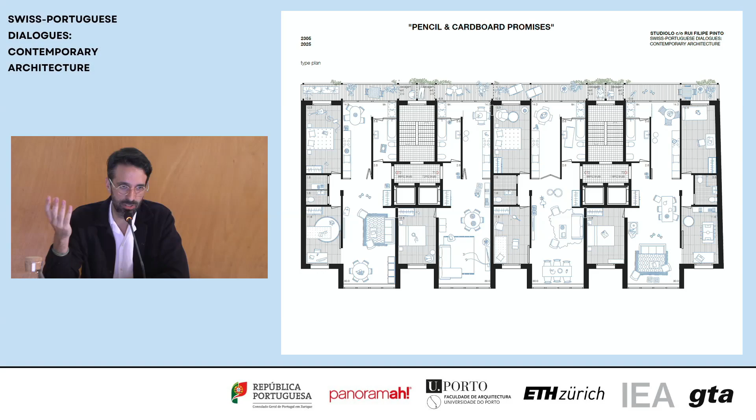To give 5.6 square meters to a place that's not part of the enfilade, the constellation of the house, seemed like a missed opportunity. So even the bathroom is part of the house, and most of the time you can really circulate.

I'll show one quick example: you could enter here, go through the bathroom, wash your hands, leave your clothes in the laundry, be in the kitchen—already in relation with the activity in the main room. This is more like a joker room, but you can also use it as an office, come back, come from here to the balcony—this also occurs in all the other apartments.

For us, this was a super pragmatic way of building because it was much more economical. There would be areas with generous windows because of this idea of having light.

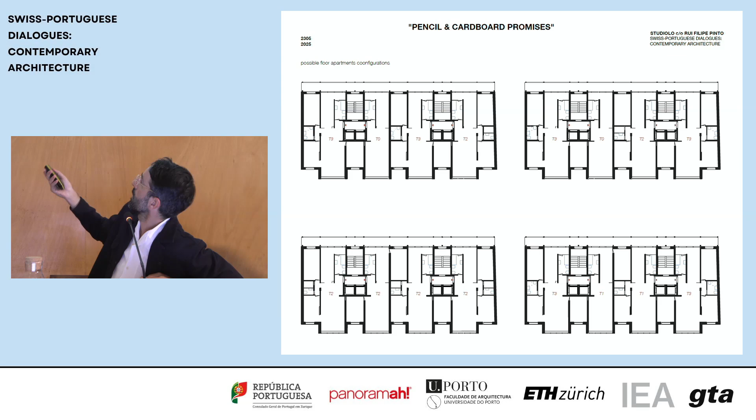We tried to make it possible for the conjugation or constellation of the flats to change. So this is a bit the possibility: if you needed this room and the neighboring flat had one available, you could put a door and have it for yourself. You could have 1, 2, 3, 4 T2s, but you could also make studios—because it was a cooperative, it would be possible to negotiate this.

And if your kids leave the house and you no longer need so much space, you could reduce the surface and also the rent by doing this, giving your neighbor the possibility to have more space.

Normally the challenge is also making a house that is not a high-rise, but that has a certain segregation—you enter in the lift, you go home, you don't see anyone. So we decided to put public programs on the ground floor and on the top floor.

The common room and the laundry are on the top floor. The laundry is actually the best place to have it because we had a water tank for recovering water, and we could use this filtered water right away directly there. On the ground floor we had the cafe and a kind of rentable area for kids and for birthdays, and also two guest rooms, because the flats are not too big, so if you have someone visiting you could always use them.

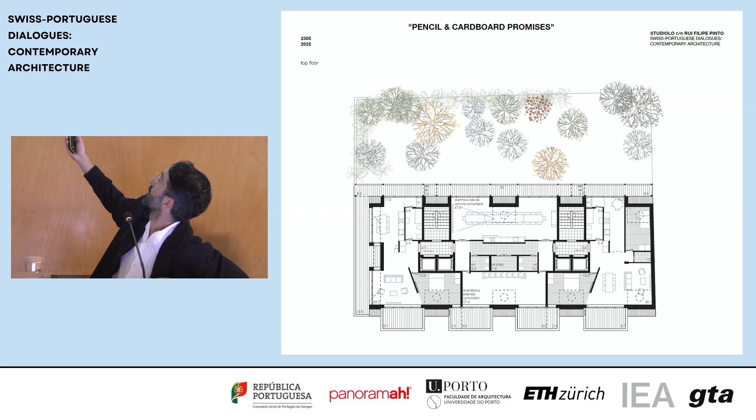So here it's a bit the plan that tries to promote the relation with the garden. On the top floor we have two special apartments that are slightly smaller, and we always like to imagine that if there's a party in the building, you could also use the nice laundry space with the balconies. So we tried to make a system where this space would be possible to use in continuity, and there's some equipment to somehow help out.

It's a competition, and like I said, we were last in this competition, so again, maybe notes are not recommended. This was a competition we did in Switzerland, also for housing. We were not last in this one.

It's in Bassersdorf, a small village close to Zurich, and there was the proposal. So here there was a site—this is the site, and it was a house where a priest was living. Because the community could not really afford to build a new house for the priest, it was super degraded, it was not possible to keep it. We asked for the existing plans in order to try to make something, but it was impossible to really work with the existing house.

So the solution they found economically was to make a bigger building where the priest would then get one of the flats, and they would sell the other five flats as an investment to pay for the priest's house—they would take that money and pay for it.

The site was super beautiful. There's a forest on top, and there were four beautiful trees that were recommended to keep. We decided not only to keep those four, but to keep all the trees on site. That was the premise of the project. Because we could not keep the house, we decided that the trees would be our starting point—that would be our material to work with.

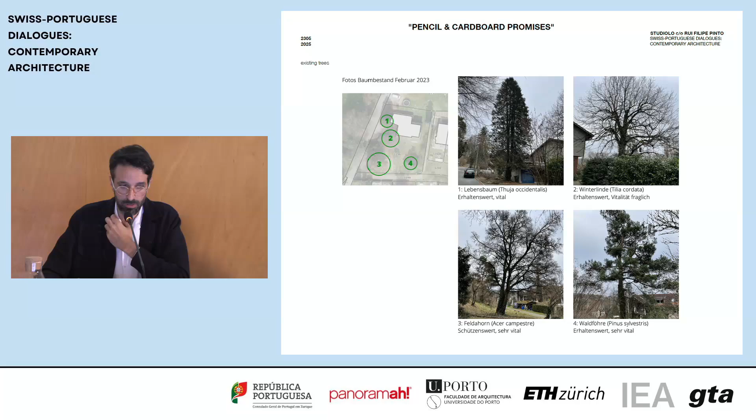So we liked to imagine how, like I was explaining in the beginning, we could make an architecture that does not necessarily come to impose itself, but also valorizes what's on site.

So the house, again, a little bit like compared to the work of De Maria, at least in my point of view, acts as a catalyzer, or has a way to reinforce the quality of the nature. So we wanted to do a house like that.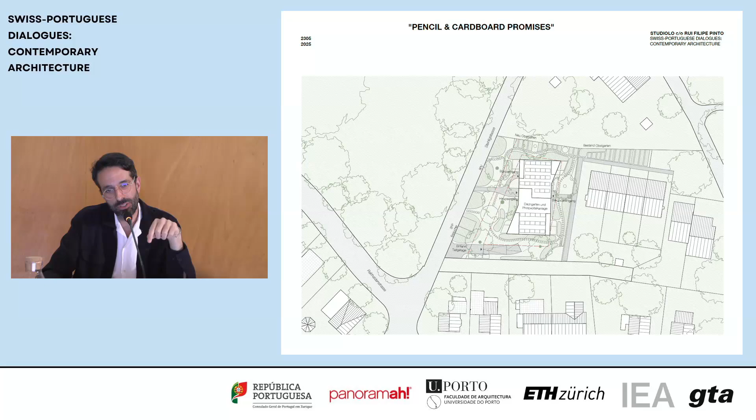This is a bit like the site plan, and we drew all the trees of the site as an homage to Herzog and de Meuron. All the trees are exactly where they were, and then the trees fold the house two times. It's a simple square, rectangle, folded on the corners by these trees. It was a quite strong, heavy law, super complex.

The law said we needed a certain amount of apartments, six, plus an office, and we could only build two floors and more than one attic. But there was a particular law that said all floors more than 60 centimeters above the natural existing terrain are considered a level. So if we had made a flat building, we would have lost one floor because the garage would be considered a main floor, not a garage.

So we had to make a kind of split-level house, and this was a challenge. It was quite funny to imagine how a lift works on a split-level house in such a small building. So for us, the house was a little bit like this.

This Japonica, this beautiful retreat in this Carl Blossfeldt picture—we thought that maybe we needed an element that articulates these two heights.

In the model we have a kind of spine in the middle, the vertical green line, and the stripes just come from it. Together with the homage to Carl Blossfeldt and the existing trees on the site, somehow in our mind it seemed we were making also a tree house, and this made sense.

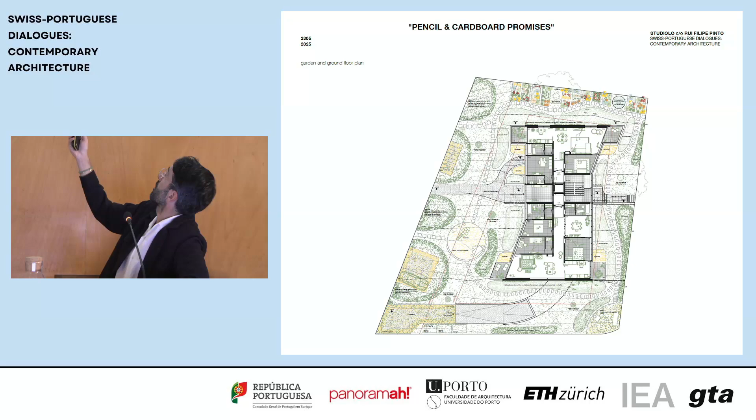These are ideas we find interesting to potentiate the size of the apartments. One discovery was this spine in the middle of the plan where the lift articulates the two heights without being in a box, so when you open the lift you could sometimes almost see your neighbor on the upper part.

This is a vision of the priest's apartment with this relation in all the senses, and we thought the chimney would be a great way to symbolize this rurality.

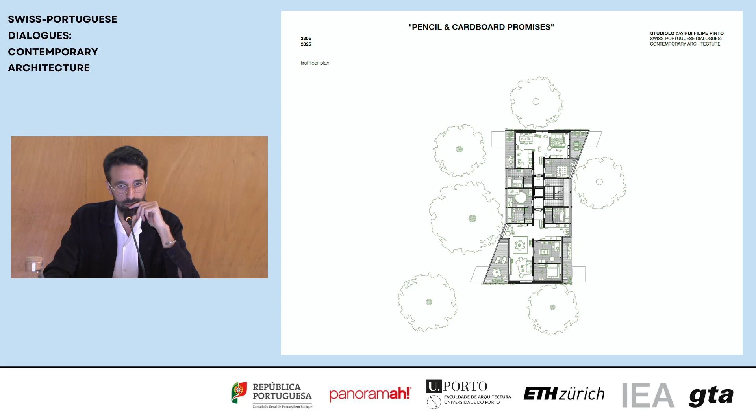On the attic, we step back but still make two apartments that are slightly different, keeping the same qualities—a smaller one on top and a bigger one on the back. When we're on top of the tree, somehow from this apartment we relate to the Pissarro painting in the back.

When we make a house in this context, I was trying to speak a lot about vernacular ideas and things that are on site. It's still quite important to think how we can make architecture of our time that still has a bit of fresh air. We returned to Klimt, and this wood house was somehow always around. We asked ourselves how to make something as beautiful as this Klimt house, but in a more contemporary way—so we were weaving these stripes, as shown in the model.

We were pushing stripes, trying with wood, but applying it not as a monodirectional element—we were changing with wood. In the big facade we used bigger scale plates of wood with green bitumen sealed between them, while on the top facades, like these two faces, we used horizontal wood to give a bit more weight to the building.

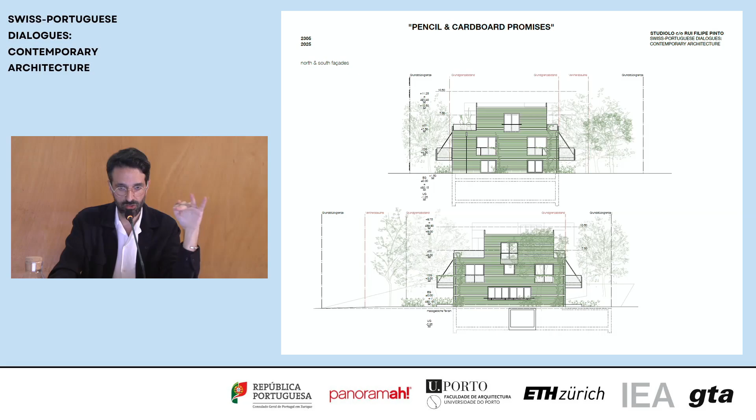Here we can see these stripes all in the middle spine, and on the other side the stripes turn and the scale is different.

And this is a little bit a view from the garden and how these 2 worlds collide between the horizontality of the faces and the more verticality of the stripes.

Now the last one. Am I really bad with time?

Is it okay? Okay, so the last one, I decided to put this project because, like I said, it was 2 lost competitions, but we like to believe that in the end we lose the competition, but we don't lose the ideas somehow, no? There's things that always stay with us, and it's our own research. So when we have the opportunity, sometimes it does not occur in this project, but we try to recycle materials, but also ideas. And this is 2 semi-detached houses in Portugal that we are hopefully starting to build next month, and it's in Aveiro, not so far from here.

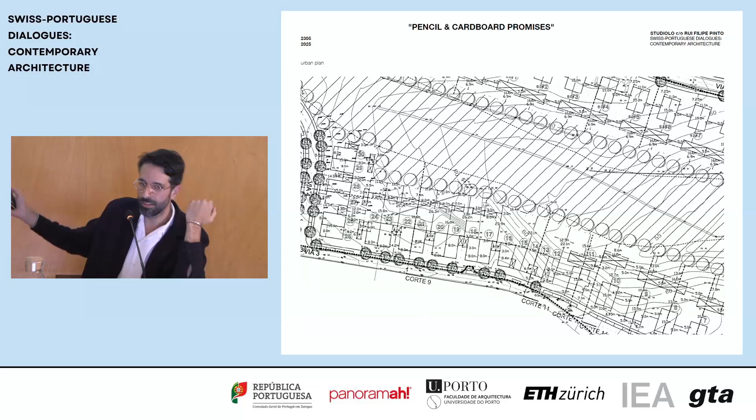There's an urban plan that regulates this site, and the urban plan decides where you have a villa and where you have the semi-detached villa. Because it's an urban plan, most of the things were actually already defined. Stepping back from the street 5 meters, the building can be 8 meters large, 15 meters deep, 3 meters of passage. So that was what we had, and we were on the 18 and 17, that was our plots.

And we have never made a semi-detached house before, and right away we started to understand that there are certain questions about making a semi-detached house. A semi-detached house is a typology that was actually, I don't know if invented is the good word, but it was developed in the end of the 17th century mostly by landlords that wanted to accommodate their employees in a quite efficient and economical way, but still, because it was a lot about representation, they wanted to somehow look good for their friends. So they made these villas inside of this context, and later this typology was imported to cities, and it was disguised as a villa.

And there were mostly 2 ways of making semi-detached houses. The first, on the left, from Norman Shaw, was to repeat, mirroring the facades. So there's an idea that you have 2 houses attached that are the same, but mirrored. And then on the right, you have Le Corbusier, Weissenhof, Stuttgart from '27, where the idea is much more to make one single building much more homogenic. So the only moment where you understand there's 2 houses is this small element on the fenêtre en longueur.

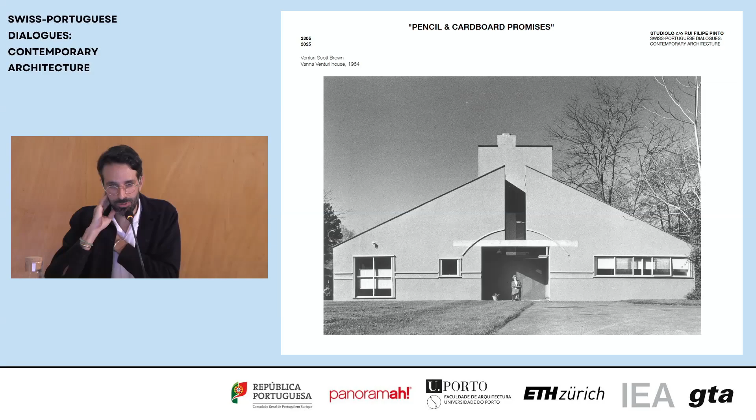We decided that neither of those were really interesting for us, or that was not what we were perceiving. We wanted to create something that was ambiguous, so that sometimes you would look and think it's one house, and sometimes you would look and think it's 2 houses. So we started to work with the most conventional and most prototypal ideas of what's a house. So pitched roof, chimney, and of course, I think Venturi was also trying to somehow search for that.

But this house, because it's 2 houses, needed somehow 2 faces. So it needed to have an asymmetry. And this is a picture of Janus, the Roman god of time, where he has 2 heads. One is a younger one, and the other is an older one. The older one looks to the past, while the younger one looks to the future. Some artists represent them almost similar with small differences, and sometimes it's also more different. But we were really wondering how could we make something that's quite close.

So we presented this to the city council. It was our first model. We presented it to the client who was happy about it, and then we presented it to the city council, and the city council said, it's all good, we like it a lot, it will not be a problem.

We returned home, and 2 days after, the city council called us and said, look, there's a problem. We actually forgot to send you a section, and it's not on the file of the project. But now we realize that you cannot make a pitch roof parallel to the street. You can only make a pitch roof perpendicular to the street. The client was already in love with the project. It was quite a downer for us. So we decided that we would not tell this to the client until we had a solution. So this is what we did.

So we arrived, we explained to the client that we had a problem, we inverted it, and we made the pitch roof perpendicular to the street, but we emulated the old facade on the new facade.

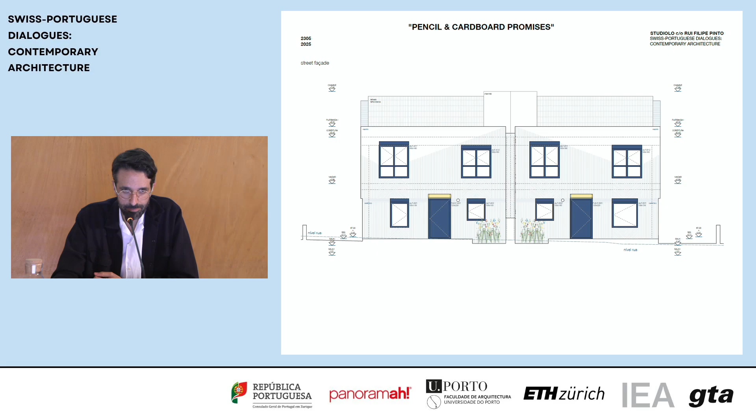One thing also, as we were saying, first when you look at the facade it seems that it's a symmetric facade, but if you look carefully it's not, because this window is the same window as here, and then this window is a vertical rectangle while this is a square, and this window is to the center, while this window is really a bigger square and aligned to the lateral part.

But we kept the two doors here. We did not want to make them step back, again because of this idea of the ambiguity - is it a house or two houses? And we really celebrate these two chimneys in order to symbolically say that maybe it's only one house.

And here you see, with the beautiful pictures of Francisco Ascensão, the two volumes that are next to each other in our office.

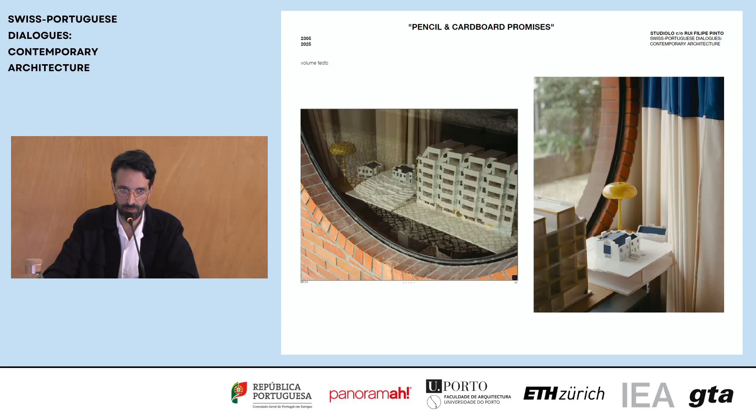And the situation of the entrance, and the way that it articulates - although we need to make a pitch roof to the left, to the other, on the lateral facade, we there assume a platibanda, like a kind of a horizontal, and then the roof just starts after. So there's a lot of trying, with not making what they want. And this is a bit of a picture.

Also the trees we decided to put are both citrinos, but on one side is an orange tree, and on the other side is a lemon tree, which also creates this friction between the color orange and the yellow.

The land is quite steep, and for economical reasons we did not want to move land. So we imagine the site as a kind of a sequence of spaces. Sometimes the spaces are inside, sometimes the spaces are outside. They are spaces that are thought to be occupied, depending a bit on the will of the clients. They can shift, they can change, and they gradually occupy the slope.

So here you can see, we enter, we have a kind of a lateral ramp where you can also have a car if you wish. And then you enter, and inside of the house you will also step down. After the house we have a first paved terrace, and then you can have a garden or a swimming pool, and then you can have a kind of Obstgarten, a place where you do agriculture, and in the end you have a pergola with a summer kitchen.

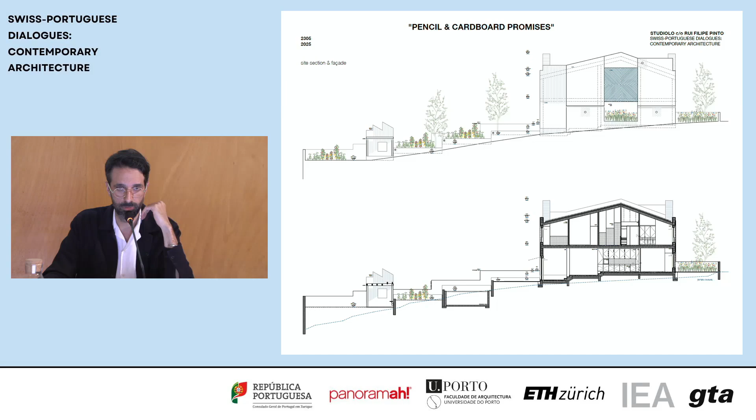We were again wondering a lot how you open a window. And there's this painting from a series of four from Magritte that we like a lot. It's called The Human Condition, and it's the last time I read, I promise.

It was quite fundamental that inside this relation with the exterior, sometimes you would create these relations, and there are two types of windows in the project. Sometimes they are small squares that frame the outside, a bit like a painting, and sometimes there's a big window, only one or two times, where the window is a mechanism that tries to disappear, like it was a limit, but only in order to detach from the outside aggression of nature.

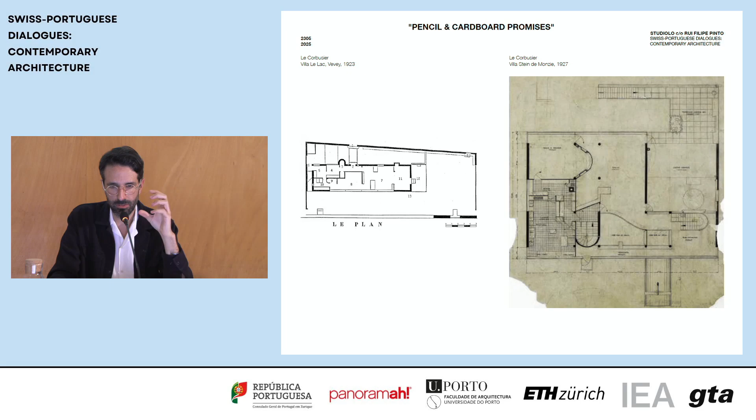In Villa Le Lac you have the wall, but in Villa Stein you already have spatial developments like wardrobes, more complex walls. So we tried on the ground floor to do exactly that, in a less virtuous and less talented way, but with the same system where it's always possible to walk around these elements. Sometimes it's a pillar, sometimes it's the kitchen that on the other side is a wardrobe, sometimes it's the joker room that for now is an office, but later can be converted to a sleeping room in case someone has reduced mobility.

The bathroom plays a super interesting role because it's really part of the circulation of the house. For now it's a guest bathroom with the possibility of becoming a laundry, but it could also be adapted to a bathroom for people in a wheelchair or with reduced mobility. This is a view from a 1:20 model where you are inside the bathroom and can see how it relates to the rest of the house.

Again, somehow the way the spaces relate to each other creates these sequences, and the outside spaces are part of the same sequences—stepping down, coronating it with the pergola and the summer kitchen.

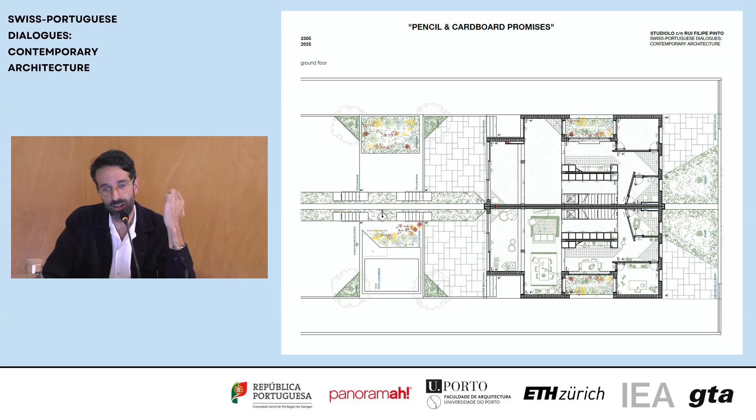We also had one law that said we cannot open windows within 3 meters. What we did is—since it's a huge pleasure to have daylight in the kitchen and important to ventilate—we stepped it back, aligned it, and created a courtyard where the tenants can now grow aromatic plants, which is quite useful being close to the kitchen.

This is what we imagined, to create this inner world that's protected, and all the windows adopt a different shape. So the way you relate to this garden depends on the room you're in, and it's always different. From the main room you can see the kitchen, and you can also see the square window, and the triangle window, and still maybe see even to the inside.

This is a view through the courtyard. There's also an advantage on the top floor—it's a bathroom, and because of the wall in front of it, you can be quite exposed without worrying whether your neighbor is watching or not. Quite a naturist project, like you see in this section.

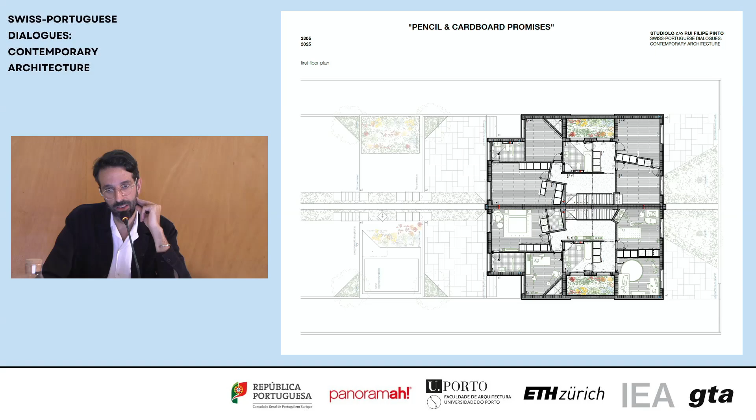When you go up—it actually started as a 2-bedroom apartment, and then the client said it's much better to sell if we have a lot, it's much more profitable, so we had to add many more rooms. So the plan is quite dense. But we tried to still keep the same ideas we had on the lower part, and it really works with this main core the same way. Here you can always use this articulation to circulate, which would normally be the kids' rooms, so you'd also be quite close to the parents' room.

It would be quite closer to arrive here. And like with the facades, we proposed to the client that they are super similar, but small changes could occur. So in one of the rooms, we have this communication between the two rooms, in case, for example, the kids are too close in age, that they still feel that they live together or they sleep together.

And on one side, we have a split bathroom, while on the other side, not. And this is the house without the roof, and maybe it's complex, but maybe we looked so much at the plan that it seems so obvious to do it. And when you take the roof out, it's still, for us, a quite beautiful silhouette with all these events. The way this relates to a pitched roof, where we started the project in another sense, it's quite a beautiful discovery when we analyze the model we built.

And this is hopefully changing soon. Thanks a lot.

Thank you, Rui, very much. Yeah, I feel very inspired and stimulated by that.